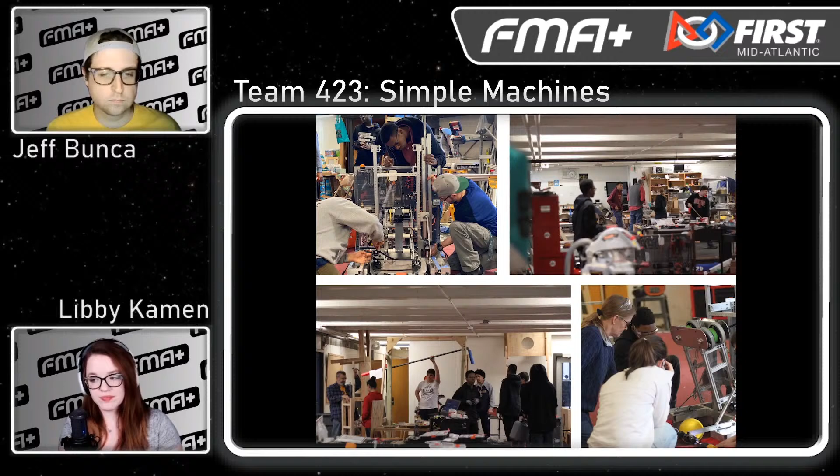At the beginning of the build season, we usually make a schedule and have deadlines to complete tasks, but we make sure to incorporate extra time for failing and improving because we usually learn the most from our failures. If we have time to fail, we usually end up with a mechanism that survives competitions and performs better, and we can use this information we gain from our failures to improve in the future.

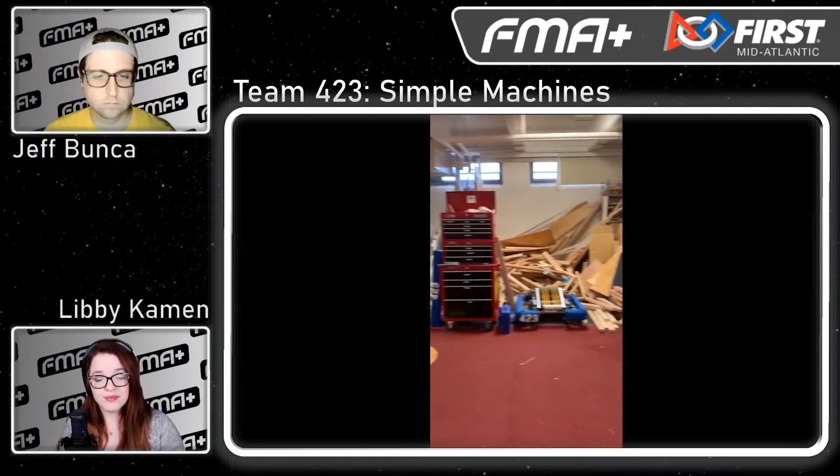One example of us planning for failure is how our drivetrain design is held in place with 2 bolts on each side, so if one fails, it is very easy to drop it out and replace it. At competitions, it's very common for something to fail or break. So when this happens, we usually make a note of how and why it failed, start thinking of possibilities to improve the part after the competition, and then fix it as much as possible before our next matches.

Nice. Yeah, Jal, let me ask you, how did those mottos get applied to building this year's robot specifically? Yeah, so the mottos that Joshua and Owen said, for example, engineering is choosing, helps us go about designing.

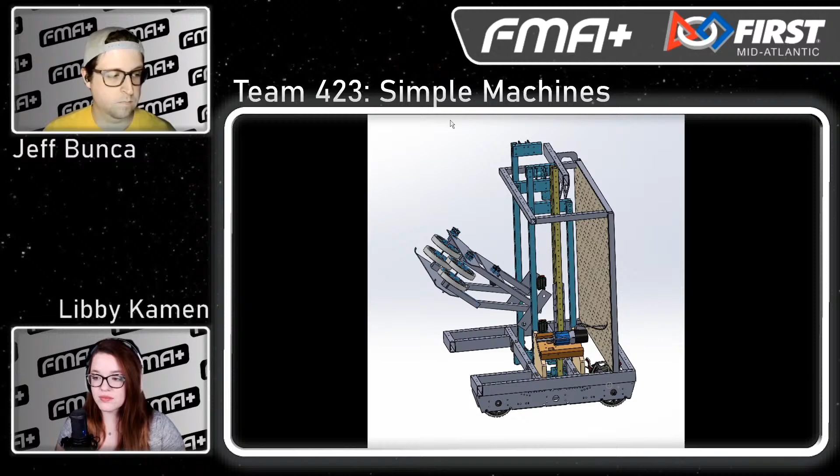So when we think of designing, we have to think about the consequences of each decision, and we balance those against Joshua's laws of robotics, which are: number 1, drive reliably; number 2, do at least one scoring task repeatedly; number 3, participate in the end game; and number 4, be prepared for inexplicable dancing.

Joshua's laws give us more focus on what to prioritize. So when we're in the early stage of planning, we look to Joshua's laws of robotics to narrow down which ideas to pursue. I love hearing about the structures for decision making that different teams make, so thank you for giving us insight into yours.

Now let's start with this year's robot, of course, from the ground up, as we typically do. Ryan, what was your solution for driving reliably, and is it different from typical FRC solutions?

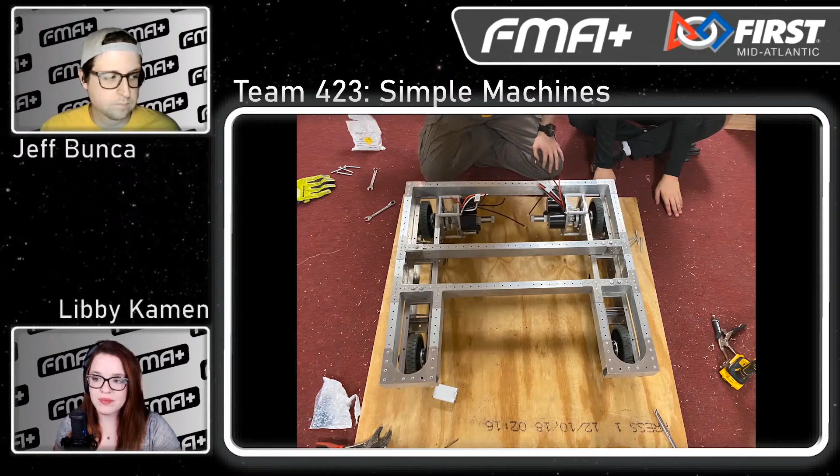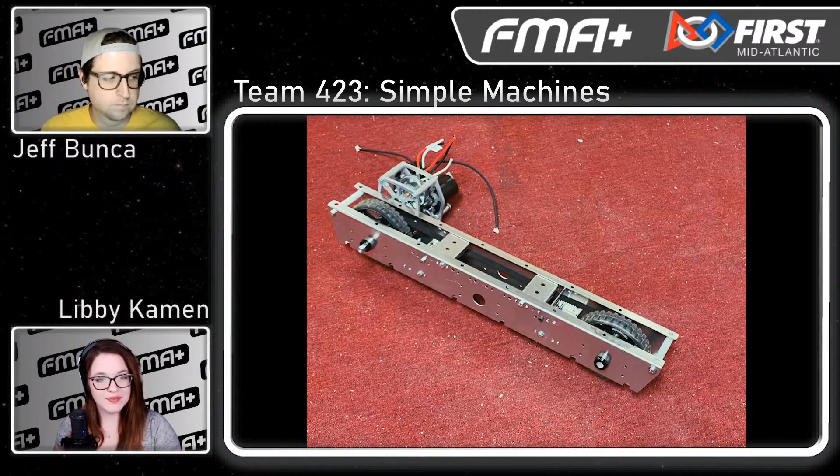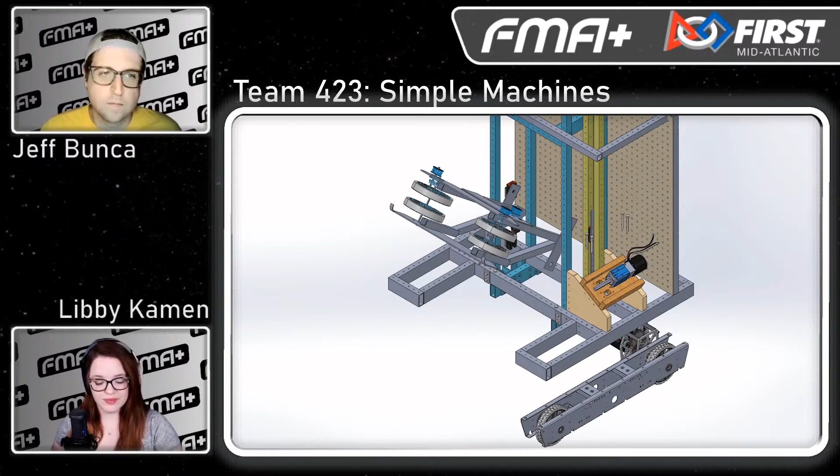So this is our second year of doing our custom design for our drive system. Last year we used version 1 of our bogie drivetrain, and this year we used version 2. We use a combination of off-the-shelf parts and design choices that yield a custom solution. The bogie drivetrain design is a 4-bolt droppable drivetrain where you take 4 bolts out and you can drop it off the chassis, so you can work on each individual side independently.

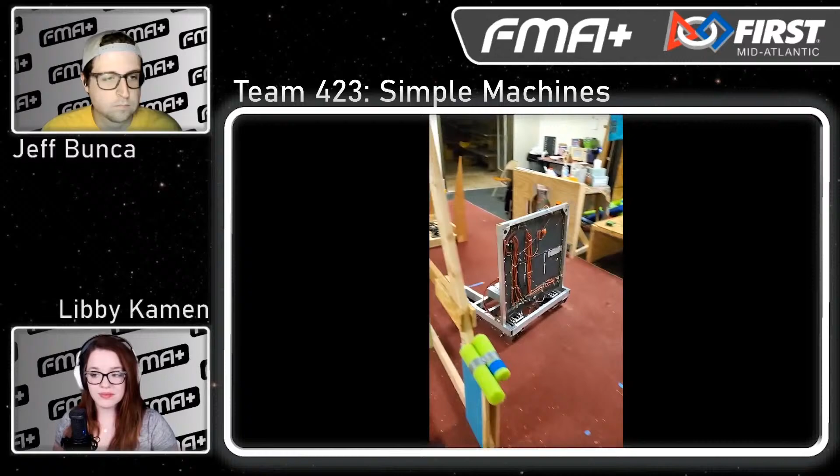The drivetrain is made from laser cut sheet metal and CNC press brake folding. We use aluminum sheets to create our lightweight design. The design allows for different configurations after fabrication if the overall chassis design needs them. It's able to change between a 4-wheel or 6-wheel design, and it's universal depending on where the motor is mounted. We use belts for easy tensioning.

We are using the Evo shifters for the first year, which allows us to have better control over the robot. Each drivetrain bogie weighs just over 10 pounds with motors and gearboxes, and the entire drivetrain and chassis weighed 32 pounds.

Nice. So, Owen, let's talk about scoring. What was the plan for scoring repeatedly this year?

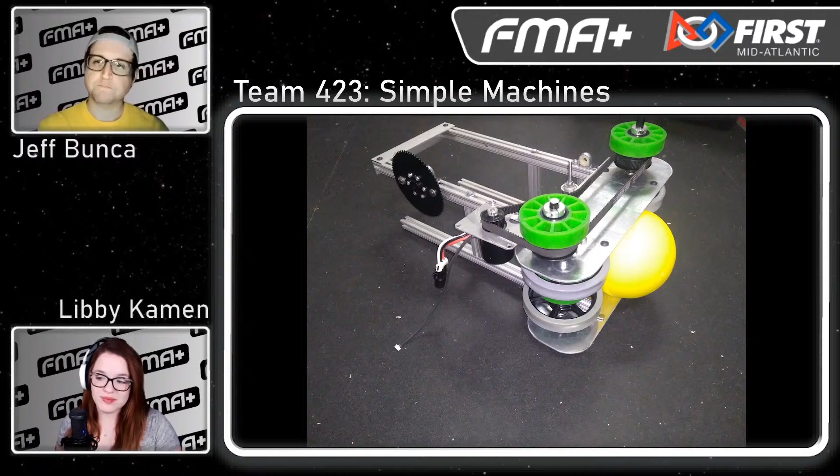Our plan for scoring repeatedly was to have a shooter that went down to the ground to pick up power cells, stored them behind the flywheels, sped up the flywheels, aimed at the goal, and then used a conveyor to push the power cells into the flywheels.

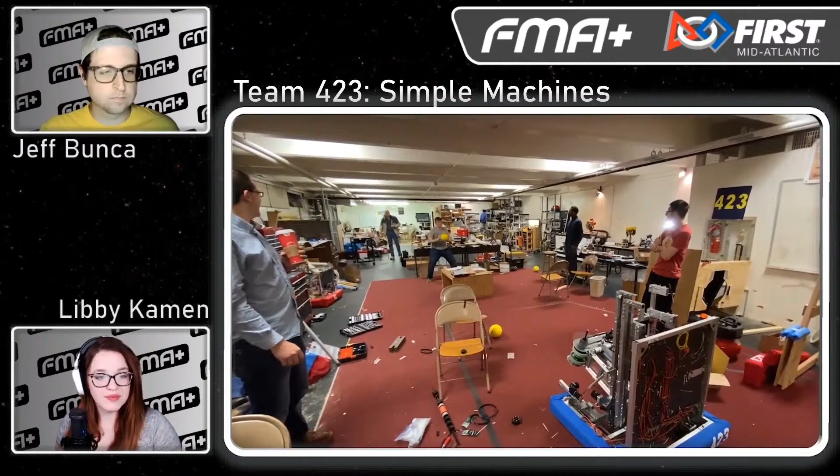Our shooter had a way to adjust both the speed of the flywheels and the angle it gets shot at, so we had multiple ways to adjust our shots in the heat of matches. Also, the shooter was able to pick up off the ground or the loading station, and shoot at all 3 goals.

Later in the season, we decided to add a mechanism that made picking up power cells easy. Our requirements for it were that it had to be light and it had to be able to drop out past the bumper to grab the balls and move them to the shooter.

Although there were some challenges with mounting the intake because so many things were changing on the robot at the time and we had to improvise a mount, we were able to create an intake that would drop down, center the power cell with mecanum wheels, and then push it into the flywheels of the shooter.

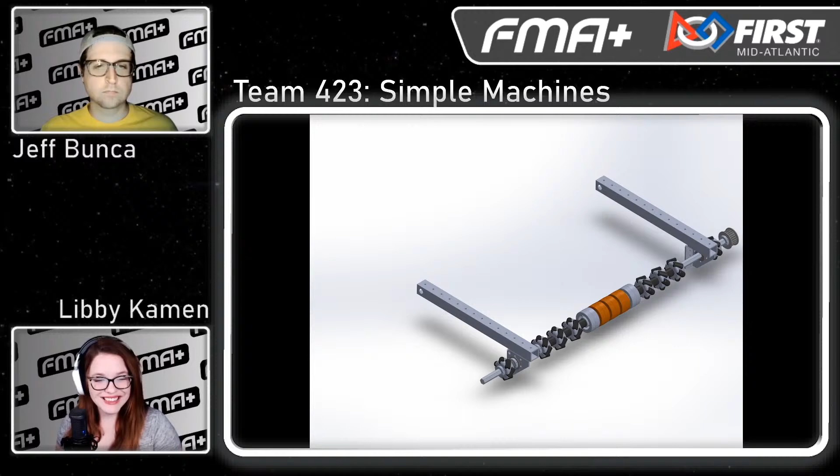Luckily, it did not break at the competition and was very good at what it was designed to do, and greatly assisted our pickup speed. If we still had access to the lab, we would probably make the design more rigid in case someone was playing defense on us, and we would make the wheel placement more efficient to center balls faster.

So let's talk about endgame. How did you guys participate in the endgame, and what did you feel was most unique about your solution?

Yeah, so we used a one-stage elevator, which allowed us to climb when the scale was at its lowest and middle positions. We used a commercial prismatic linear guideway, which was chosen after weight analysis and load testing.

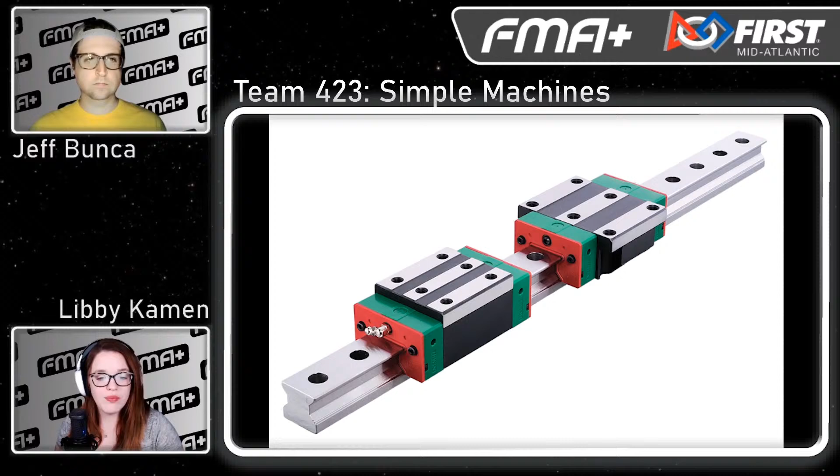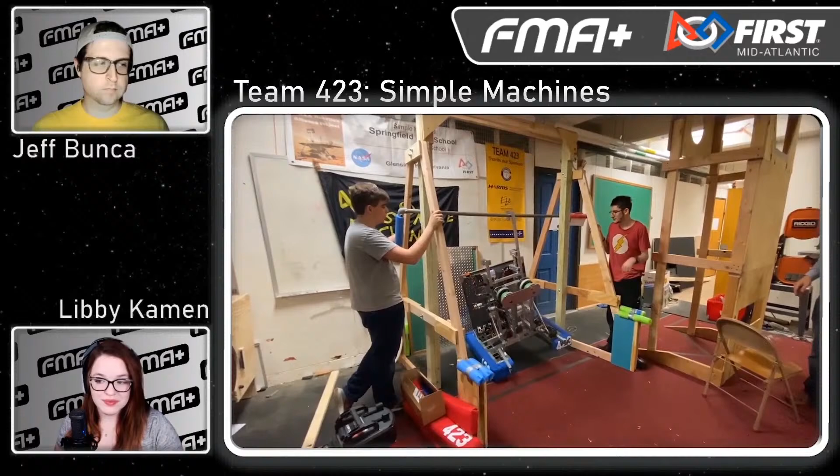These prismatic rails capture the carriage blocks in all directions while allowing them to slide smoothly while under load. The guideways are also hardened steel, which are heavy, probably why we've never used them before. But the prismatic rails give us the most travel distance because they're supported in the back so the carriage blocks can travel the entire length.

We had a very successful lift, having one of the most successful lifts in competition.

All right, awesome. So let's talk a little bit on the non-technical side. Venus, would you be able to speak a little bit about what you guys have been doing to establish your team's presence in your community?

Media and branding was one of our main focuses this year, exactly for that reason. It kicked off at Comcast Bootcamp when I attended a media roundtable. Shout out to Miss Daisy. They really inspired us during that roundtable, and we learned a lot through that session.

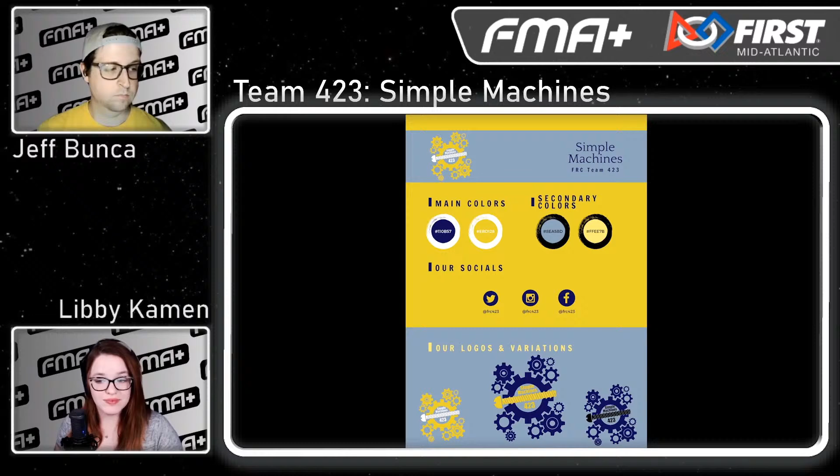We focused a lot on our consistency because we learned that the more consistent we are, the more recognizable we became in our school community and in the FIRST community. We made a style guide and kept the same logo we had the year before to help with that and to increase our visibility.

We also made a new website. Our old website was old and outdated and nobody really knew about it, so we made a new one that is now regularly updated and looks a lot nicer.

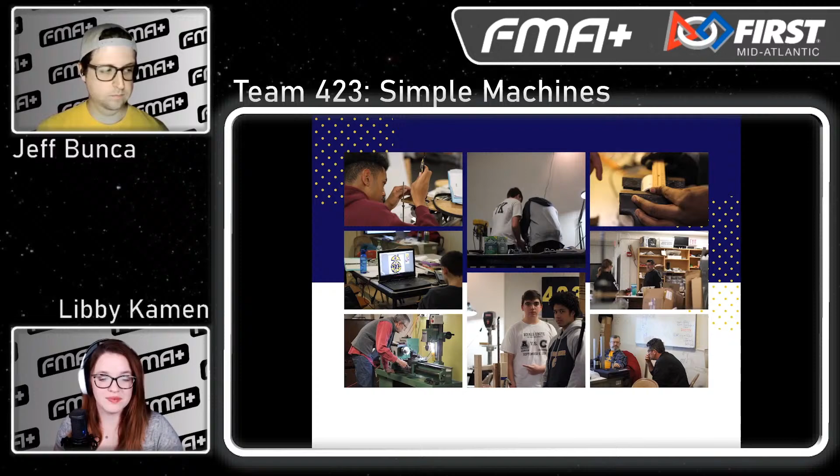We also increased the amount of pictures and videos we were taking. During meetings, we took pictures and videos on a phone camera as well as on a Canon camera. During Hatboro, we made it our mission to get good media content.

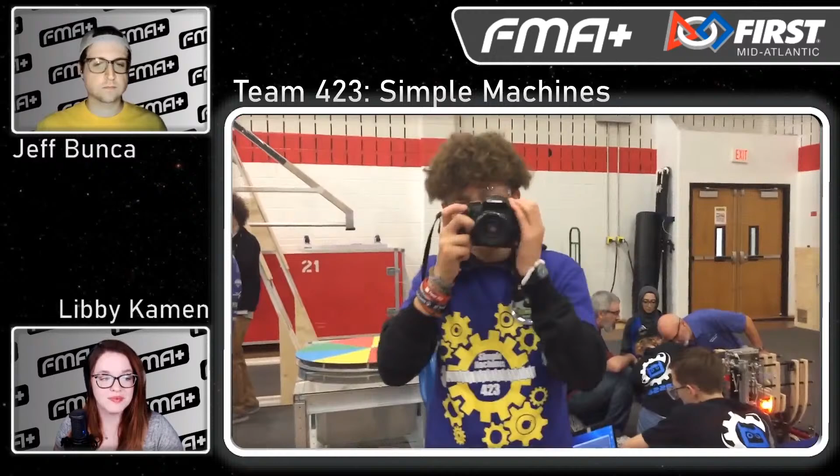During matches, I would take videos on my phone. Another member of our team would take pictures with a camera. One match, I would focus on taking videos of the robot and he would take pictures of our drive team, and then we would switch the next match. We also interviewed members during our competition and overall had a great time documenting it.

One of our biggest challenges was definitely not having enough people on our sub team. Since we're a smaller team, building the robot is the priority. Also, just not knowing what we needed to be successful, as it was the first time we put this big of a focus on our media content.

We are proud that we were successfully consistent throughout our season, and the interactions that we had through our school and through social media was something that we found invaluable.

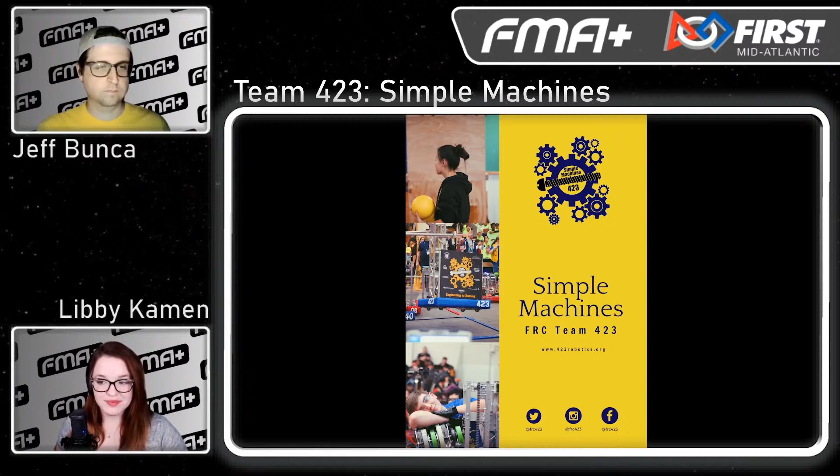As someone with a background and a career in marketing and social, I love hearing when teams think about this stuff. So props, I'm very excited to check all of this out.

Now, of course, 423, one of the teams who were able to compete this season. So, of course, what we've been asking all of our teams that have competed for Infinite Recharge: what did you guys learn? What was the experience of competition? What are you taking back with you for this future version of the season?

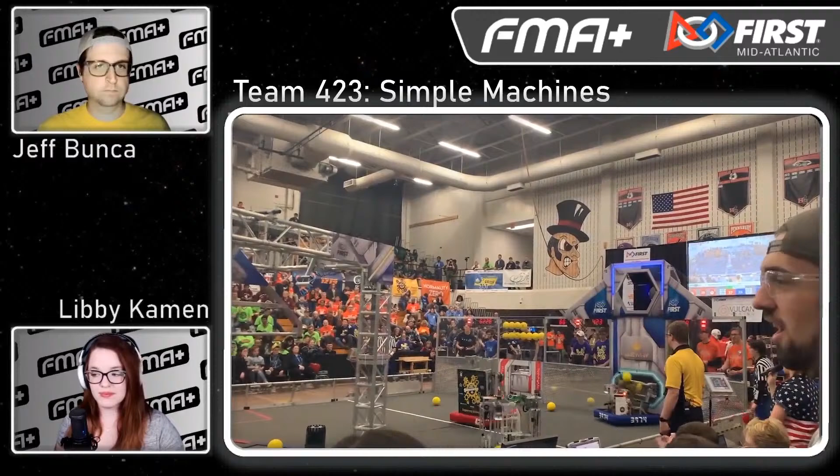We were very lucky to compete at all. All of our teams always helped us out by lending tools and vice versa, and that created a very lively atmosphere. This year, we tried a shifting gearbox instead of one with just one speed to allow us to have a low gear for precise movements and a high gear to get across the field quickly. We really like the low gear and believe that next year we will reduce it even further for more control.

Also this year, we tried a lift unlike anything we've done before, and it also worked very well even though it had little testing. We had to reduce from two to one separate lifts to save some weight.

Finally, we built an intake very late in the season to pick up balls more efficiently, and we were pleasantly surprised when it worked well. Sadly, we did not think about how hard it would be to aim the shooter with the electronics panel in the way, so a lot of our high goal shots ended up going over the goal and past the opposite driver stations. In matches, we learned very quickly what strategy worked best for us.

Because our shooter was inconsistent, we decided to attempt a shot and then drop the rest of our power cells so our teammates could grab them. And then we would play defense on shooting robots, and finally make sure we would climb because it was one thing we were very good at and it got us a lot of points.

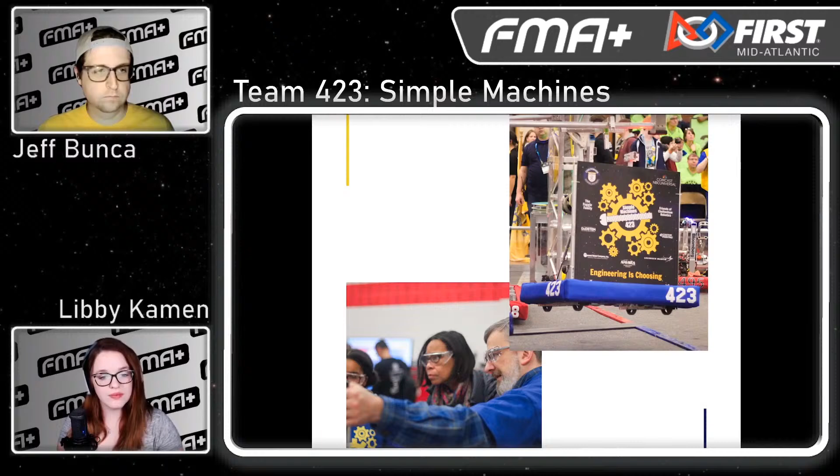Our lowest moments were during the eliminations when our climb didn't work efficiently because our drive motor mount kept bending the screws that were holding it on. So we decided to design a new motor mount to keep our tension on that chain and not destroy those screws, and we are sad that we weren't able to design and actually implement it onto the robot this year.

I hope to see that next year. Some of our highest moments were our climb working consistently throughout those qualification matches where they did work, and being chosen in an alliance during quarterfinals, which I would like to thank teams 6226 and 1218 for that opportunity.

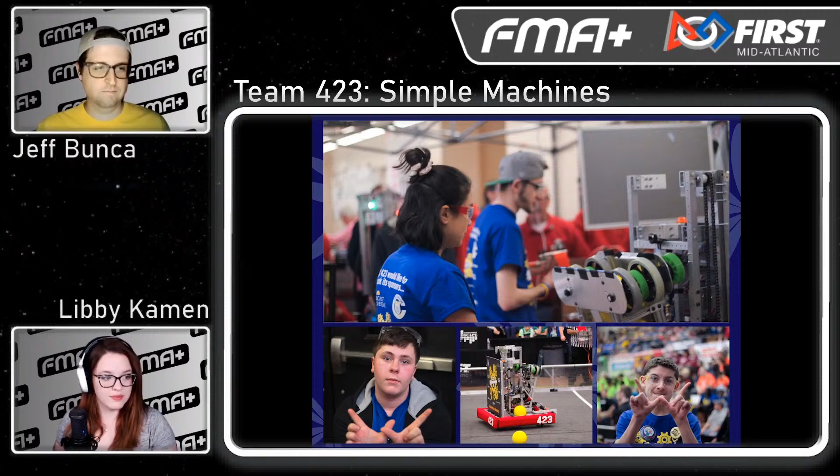Overall, our proudest moment from Hatboro was seeing a lot of elements of their robot working well with little testing, successfully climbing 10 times out of 15 matches, having one of the highest total endgame points, and as Ryan said before, going to the quarterfinals with teams 6226 and 1218.

So let me ask you guys this very general question: what were you guys most proud of?

This year, I was definitely most proud of our media team and having as many underclassmen on our team as we did this year compared to previous years. I was most proud of our team's growth because I feel like so many students got involved and learned a lot, so we'll be very prepared for next year.

Also, I was very proud of the intake I designed and fabricated because I'd never taken on a responsibility like that, and it ended up working very well with little testing.

I was proud about seeing the lift mechanism work and work consistently. I felt really proud about seeing something that I had drafted and built become very successful in competition.

I'm most proud of our bogey since I've been working on the design for 2 years now, and how sturdy and reliable they were during our competition season. I do believe that this design will live on throughout several more years of the team's history.

I'm really proud of the independence of our student leaders as engineers, fabricators, and peer mentors. It's awesome to hand them real raw materials and get back parts. It's also inspiring to watch them teach other students as they go about their work.

One of my favorite things about mentoring is being able to sit back and watch my students lead in a way that is empowering to them and makes them really feel, like you said, accountable to that project and able to accomplish something.

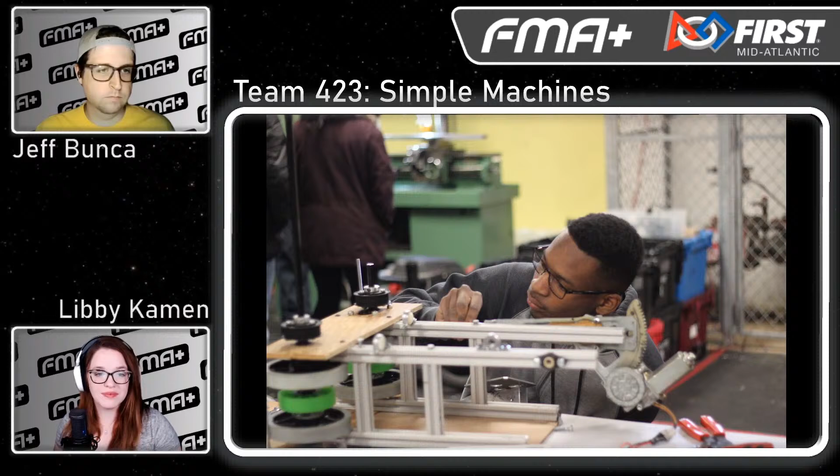What else about the Team 423 experience is different? Riffing off what you were talking about is the role of the mentors. One of the things that's a little different on our team is that mentors and students are peers.

This came from a speech Dean gave 20 years ago when he and Woody actually went to all 5 regional competitions. One of the things Dean had said was that he never envisioned this to be a 100% student-driven project. He very much wanted mentors of all kinds working hand in hand with the students and everybody putting in their best efforts. This leads to a really unique relationship between mentors and students.

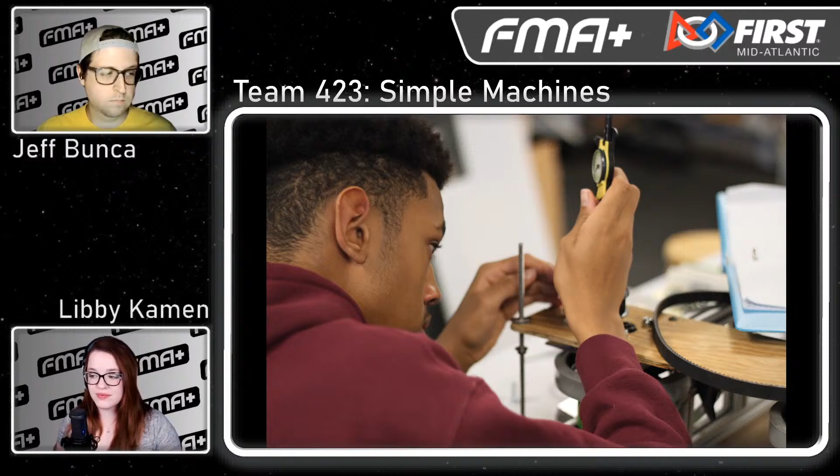We're not parents, we're not teachers. By the time our students get to the point where they're applying for colleges, I will have spent several hundred hours with them and really get to know them. Just about every student on this call, I've actually personally written a letter of recommendation, and it is by far my favorite part about being able to do this.

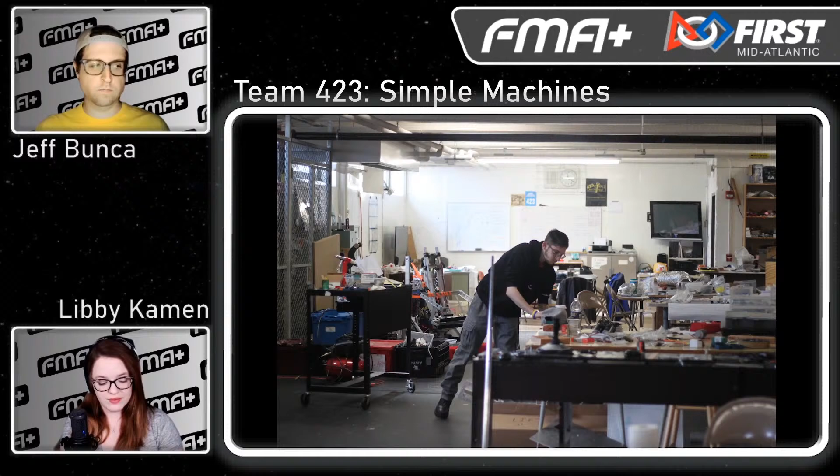I get to be a mentor and I get to help these students out, and I'm just so excited for their success and their scholarships and getting into college. It's more than just robots, and it really allows us to be more than just what it is about building and engineering students. It's outside support as well. So it's a very cool relationship.

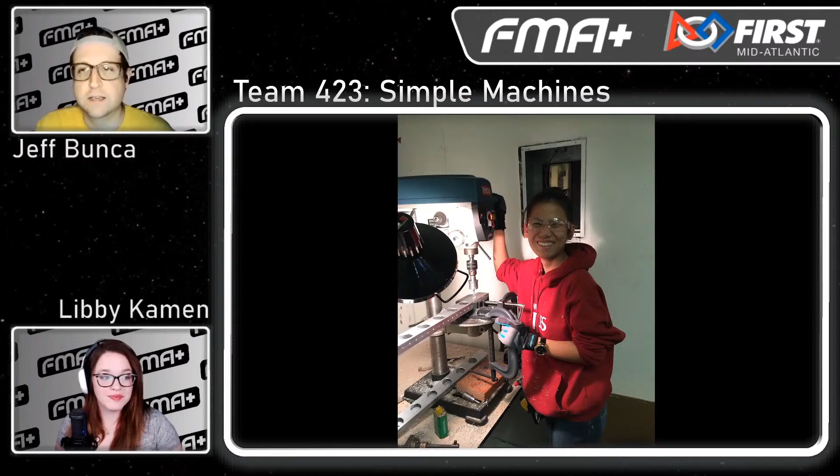It was great hearing from Team 423 Simple Machines tonight. Sounds like they have a very interesting team dynamic and a cultural aspect to their team, which makes them very unique.

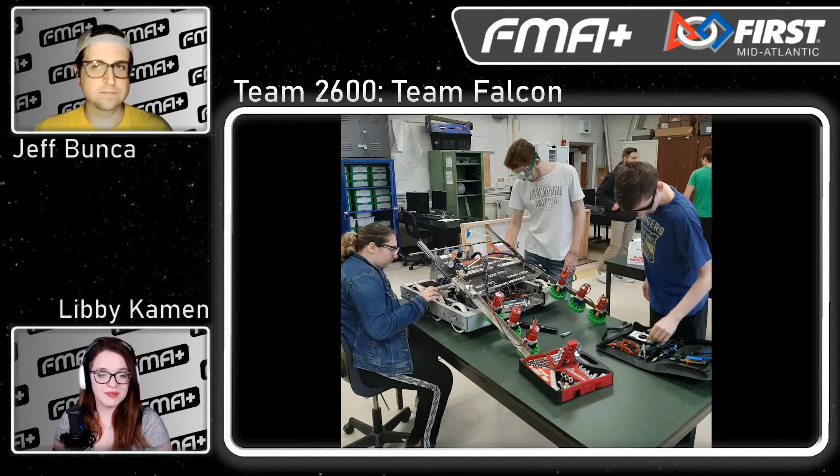Hi, I'm Joseph. This year I am a sophomore, and when I joined robotics I didn't know what I was doing. Then I just got right into it, and I knew what I was doing. I was the first sophomore to be on the drive team as well.

So Joseph, let me ask you, looking at our notes here, it looks like there's a particular challenge you had to go through when you joined the team. Maybe you could tell us a little bit about that. I'm curious to hear the story.

So I had a surgery where I couldn't do any heavy lifting, so I wasn't allowed to do anything, and I got yelled at when I tried to do heavy lifting. So what I wanted to do is I learned Photoshop to make a sticker that we put on the robot. The sticker was called Falcon X because it's our 10th robot.

I love it. I think one of the really interesting things is that FIRST teams are so multifaceted—there's so many things that can go on at once around a team. And I love that, even if there was a physical challenge at a certain part of the year, you got onto the media and art side.

So let's dive a little bit into this year's robot and your challenge. What's different about the systems you guys developed this year? Our robot is different because it is completely student built, unlike some other teams where the robots are built by the mentors. Ours is completely student built and programmed. Time management was something we had to work on, and also figuring out a design that everyone can agree on.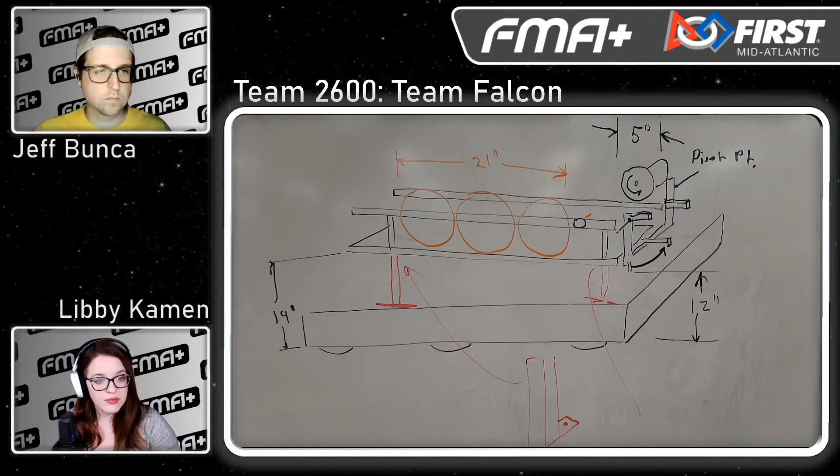So what about the weight limit in terms of the robot in its final form? Usually our robots aren't super heavy, but this year we chose to go with a welded piece on top for the ball shooter and holder, made out of steel, so it was really heavy. It weighed down our robot, so we had to make some compromises - we kept that part but took out some extra parts we didn't really need.

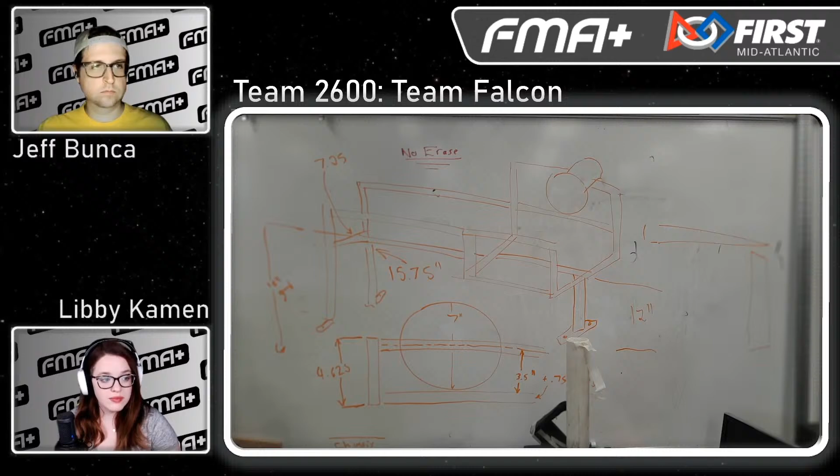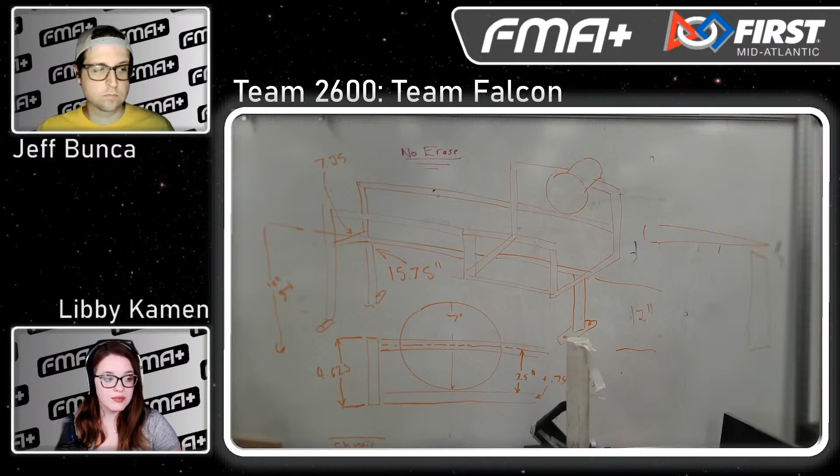What were the iterations on that ball holder design? One design we wanted was like a circle, with the shooting mechanism kind of like a turret that would turn 360 degrees. But then we decided on plastic velcroed on, kind of like a conveyor belt, with a motor where the steel was welded, bringing the ball up over the top to shoot out. We had it velcroed because the previous year we didn't have accessible parts, so this year we wanted it accessible - if we had to work on something in the pit during a competition, we could take it apart easily and put it back together.

So you guys move into actually testing and troubleshooting and stress testing the design. Jenna, maybe you could talk a little bit about that.

That last design Joey talked about with the conveyor belt style - when we were testing it, we had the motor running for a really long time, and it came not super loose, but it wasn't in the same spot as before. During stress testing, we learned it really wasn't as strong as it needed to be to hold up during a competition, so we scrapped it all and figured out something else to make sure this never breaks on us, which is why we went with a whole welded frame.

Yeah, durability is super important in FRC, right? It can make or break that competition experience. So I'd love to hear a little bit more about your manufacturing, Joey.

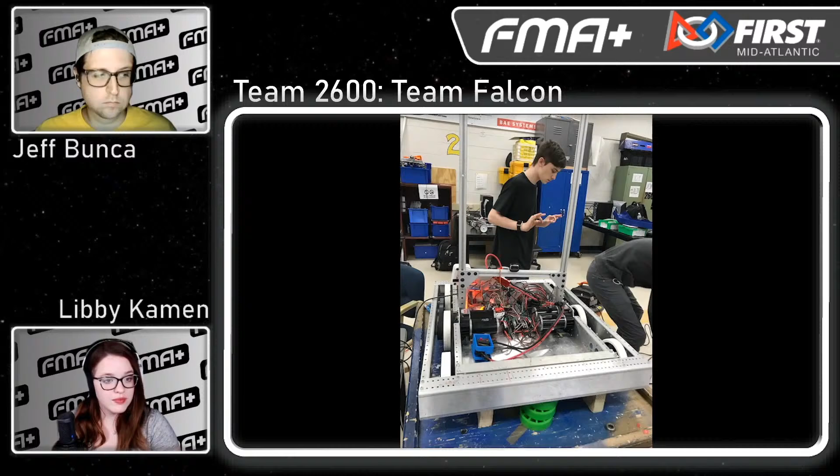For the ball intake, we made it out of aluminum square stock, and the holder out of steel square tubing, which is where we welded. One of our other mentors actually taught us how to weld that part, so we learned some welding, which is actually really fun to do.

Jenna, is that something you guys have always had the capability to do, to weld parts like that? No, not really.

This is why we're talking about it so much, so excited about it, because before the team didn't really have a mentor who knew how to weld or had a welder that we were allowed to use. We used our mentor's welder, and he's the one who taught us—it's not a skill that many of us had. So it was really awesome for us to get to learn that, and we were very excited about it.

I think one of the most unique things about the FRC experience, like you said, is working with mentors to learn a new skill or a new component in your education that you might not be having in the classroom. Now I'm seeing something here about integrating some math in here as well. So Joey, maybe you'd like to expand on that.

When we wanted to get the angle for the shooting mechanism, we had to test many angles, and we actually did have to use math. So say at a certain distance, we had to figure out the angle and the speed of the motor that we wanted to shoot, so it would hit the target.

We also took the measurements so our ball would fit in the system of the intake and the shooting. With the measurements, we had to make sure we still had enough room for the components, like the motors and the roboRIO. At one point, we had to move the battery box to one side so we could fit the whole shooting mechanism in the back.

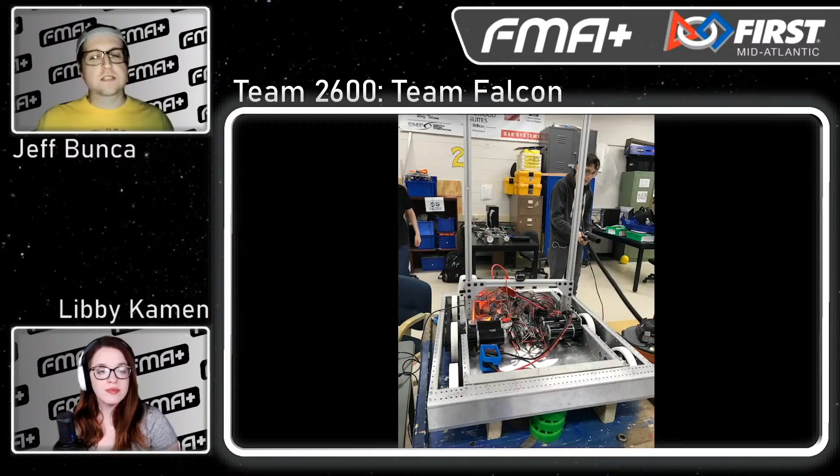Let's talk about some of the goals. What were some of the objectives that your team set your sights on for this year? Because we're really a student team, we have to pick a few goals that we know we can complete by the time it's time to go to competition.

One of the goals we picked was to have 3 balls in the holder when we started each match. That way we'd know we had enough balls to start shooting, so we wouldn't have to go and pick up balls right away.

This seems like a very achievable goal to start with 3 balls, but when we started making the holder, we had to make room for other things like wiring and the roboRIO, like Joey said. So we couldn't make the ball holder that big to hold 3 balls on its own—we had to cut it down to 2 for that design with the conveyor belt.

But once we scrapped that design and started this other welded one, it was actually elevated above the floor of the robot. So we could have all that wiring and the roboRIO on the floor and have the holder elevated up, so we could hold 3 balls and make it bigger while still having enough room for everything.

I really love the idea of hearing about other teams' iteration process—when we tried this and it didn't work, and we tried that and needed to adjust it. I'd love to hear a little bit about material selection from you guys too.

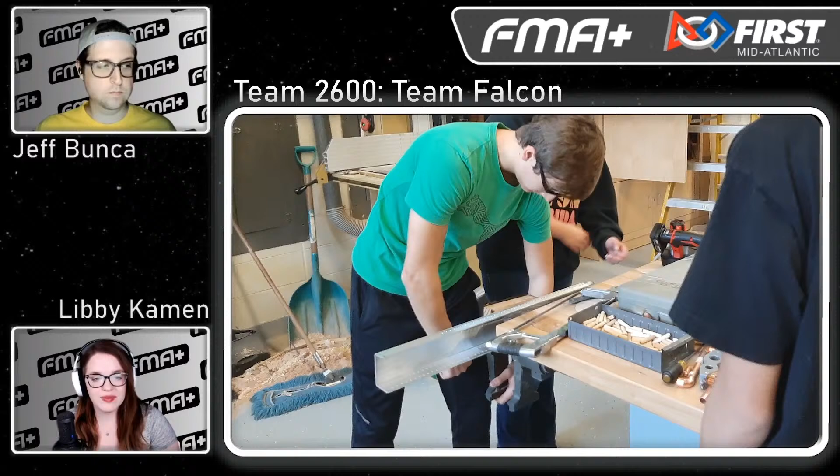We started with plastic, and it was aluminum and plastic together with Velcro—it didn't hold up the way we wanted it to. So we learned the importance of actually picking the right materials, because we moved to steel, which is much stronger, and it was able to really be welded together and not come apart under stress.

And it's really a life lesson because that goes with everything. If you're going to build something like a building or a bridge, you need to know the right materials so it holds up over time.

Yeah, it's cool—I applaud you as a student on a team, able to recognize some of the life lessons that FRC can offer you. I think that's what makes it really valuable. You can apply that in your real world situations and in your careers as you move on and past FRC. So that's great, Jen, I'm glad to hear it.

Joey, let me ask you, what's something that you're super proud of in regards to what the team's done? I'm most proud of how hard the team worked, because without many members, each person had to do more—they all had to take on more responsibility. Some of us had to take on multiple roles.

Yeah, I know Jeff and I have both had lots of FRC experience, and I think we've both been on big teams and small teams. Depending on the size of the team and the group of people, everyone's got to wear multiple hats, and it's really cool to hear that you guys are taking that responsibility on. Jenna, what about you? What are you most proud of or taking away from your FRC experience? FRC has really helped me learn how to be on a team, how to take responsibility for a section of the team, take charge, and get my ideas out there while also listening to other people's.

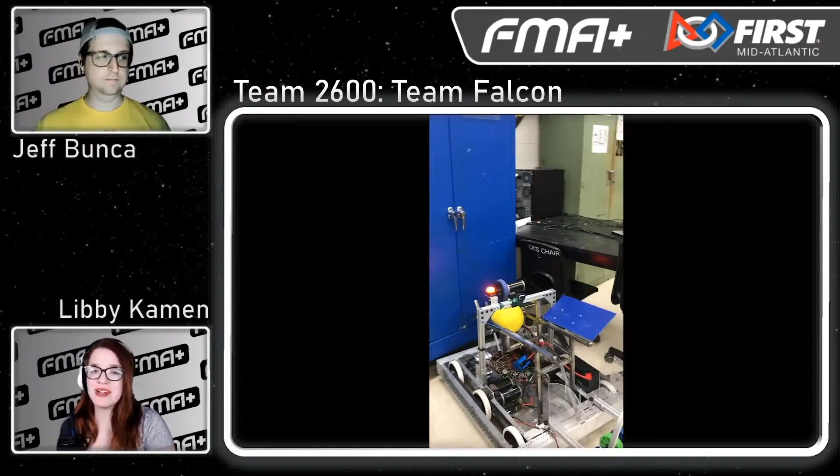Cool. So we're here with Team 303, the Test Team out of Bridgewater, New Jersey. I'm here with student representatives Nick, Natasha, and Vishnu, as well as their mentor, Mrs. Nason. So with that, I'm going to hand it off to you guys. Why don't you introduce us to Team 303?

Hey everybody, my name is Nick, and I'm currently a senior on Team 303. This year I was one of our project managers on the team, and I was also the driver for our robot. Hi, my name is Vishnu. I'm a junior on the team this year, and I was the lead programmer and the operator on the drive team. Hi everyone, my name is Natasha. I'm also a junior on the team. I was one of the project managers this year, and I was also the human player for our drive team. Today we are going to talk a little bit about our robot design and how our shortened season went.

Very cool. Well, it's nice to meet you all. Why don't you get us started with a little bit of your 2020 robot design?

Sure. So when coming up with a plan for our robot design, we like to gather for a group discussion, and we go over all the rules and misconceptions that people may have. We use that to come up with a priority list of tasks that we think our robot should be able to complete. Once we have this priority list, we split the team up into different prototyping groups for each of the subsystems we intend to have on our robot. For this year, for example, we split up into a drive base team, a shooter team, a climber team, an intake team, and a control panel team, so they could all work together efficiently.

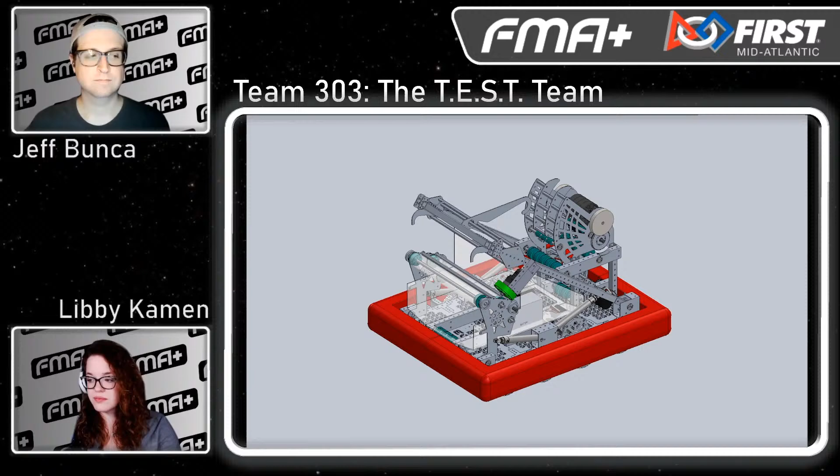We encourage our prototyping groups to come up with a bunch of different designs for each of these ideas so that we can test out multiple designs and see what works for each subsystem. Once we have identified the best design for each mechanism, we then move to converting each mechanism into an electronic design in SolidWorks, and then we move on to integrating them into a final robot design. Once the design is complete, we can then move on to manufacturing and assembly.

As far as our actual design goes for this season, we took a lot of inspiration from successful robots that competed in games like Stronghold, Recycle Rush, and Aim High. We knew we wanted our robot to be capable of loading power cells from the floor, shooting them into the high goal, climbing on the shield generator, and spinning the control panel. In our design, we wanted to prioritize short cycle times through the trench run, as the safe zone in the trench run would provide protection from defense.

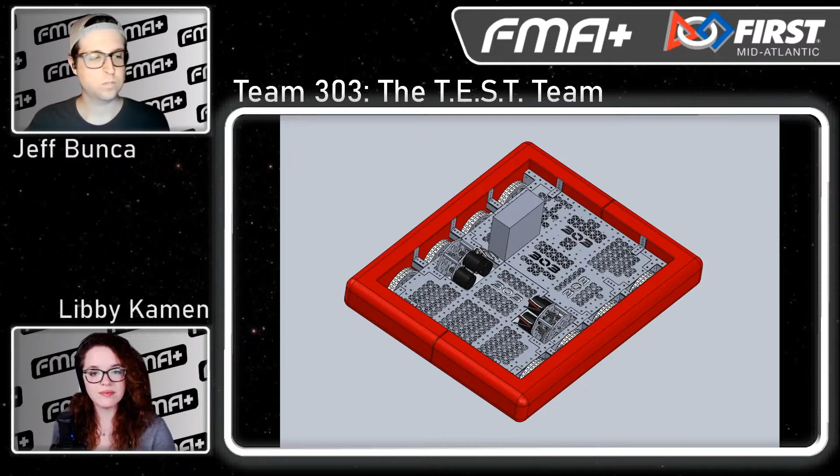This meant we had to design our robot with the capability of fitting underneath the trench run. We also planned on shooting power cells from different spots within the trench run to mitigate the effects of defense on our scoring effectiveness. For this year, our drive base was an 8-wheel West Coast drive with 6-inch VexPro traction wheels built on a 1x3-inch extruded aluminum box. It has a 1/16 inch drop center to reduce the amount of side scrub and to allow the robot to more easily navigate the shield generator in the middle of the field. Our drive base is powered by 6 Falcon 500 motors and is able to travel at around 11 feet per second.

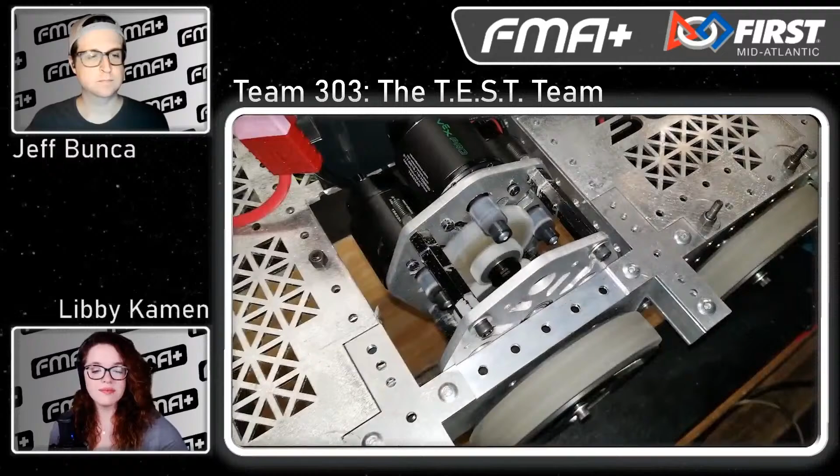Our electronics are mounted upside down on a belly pan so that they are more easily accessible and serviceable. This belly pan also serves to make the drive base itself more rigid.

The intake on our robot deploys out over the bumper with 2 pneumatic cylinders. It uses 3 polycarbonate rollers that are linked together with a number 25 chain to suck up the power cells, up and over the bumper into our indexer system. The intake is powered by a single Neo 550 motor.

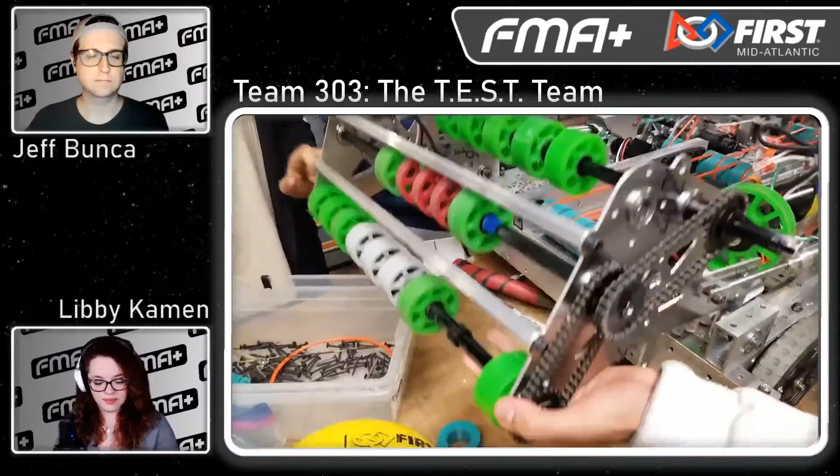The indexer system receives the power cells through the intake mechanism and stores them in an open top hopper. There are a series of custom 3D printed pulleys on the floor of the hopper that have polycord running on them to feed the power cells backward toward the shooter. The polycord system is also powered by a single Neo 550 motor.

The open top hopper also allows us to pick up power cells from the ground as we originally planned, as well as from the human player loading station.

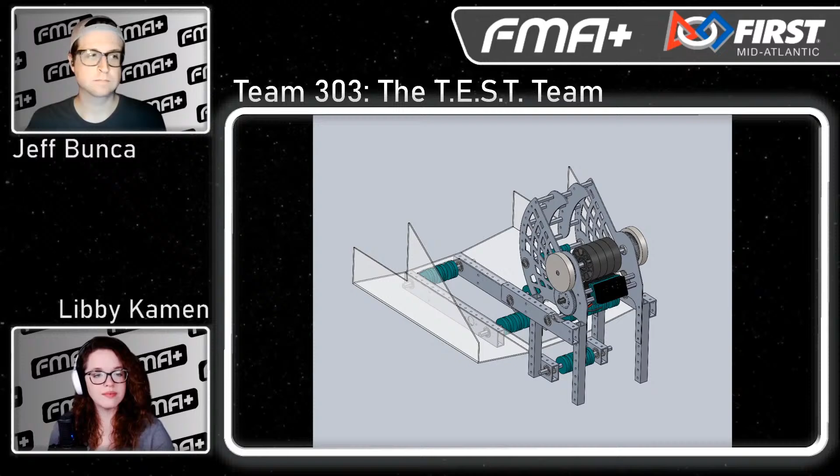Once the power cells are loaded back into the indexer, they move on to the shooter, which is a fixed angle single wheel hooded shooter, which uses four 4-inch Colsons to propel the power cells. It is powered by two Rev Neo motors, and in addition to this, it also has two custom steel flywheels to gain more rotational inertia. This has allowed the shooter to run at a very consistent rotational speed, even when shooting out the 5 power cells that we have stored.

Our climber uses a similar design to the elevators that we have created in the past 2 seasons of FRC. It's a custom single-stage elevator made using 1x1-inch extruded aluminum box, and it's powered by two Rev Neo motors. The design uses a constant force spring to shuttle the carriage up and two AM steel ropes wound around a hex shaft to pull the carriage back down once the climber is hooked onto the shield generator switch.

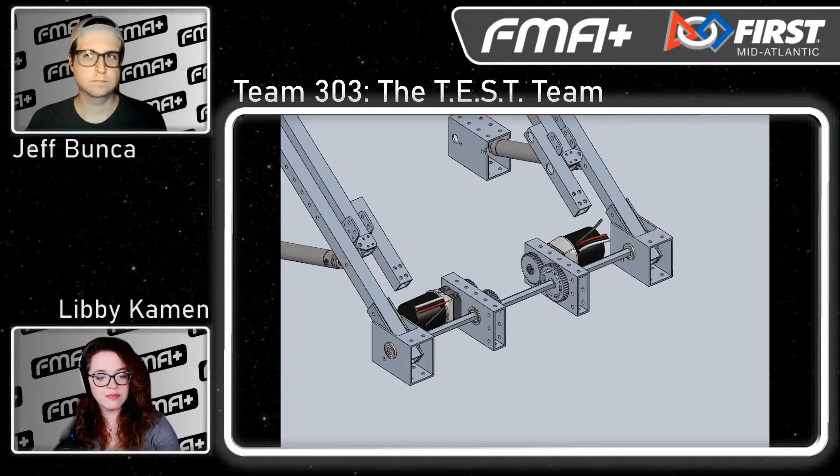Because we had set out to fit underneath the trench run, it would have been impossible to store this elevator designed vertically, as it would have been too tall. Because of this, we had to articulate the entire climber subsystem. The lift is stored diagonally and in its retracted state throughout the match, and it uses two pneumatic cylinders to extend the climber into a vertical position when the robot is ready to climb.

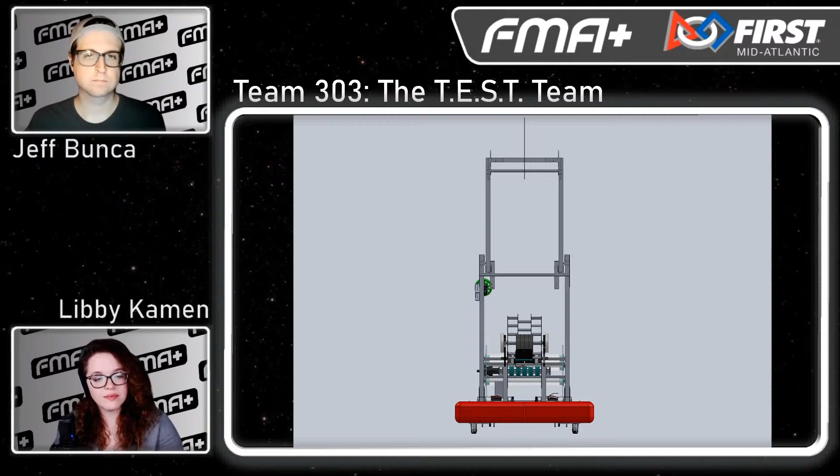Additionally, we have a secondary fold-out hook, which extends when the lift is raised up so that the robot is able to reach the rung more easily.

Our control panel mechanism is an anti-mark green compliant wheel powered by a Neo 550 with a color sensor mounted to the bottom of it. It's easily integrated into our climber mechanism as the climber was already actuating up and down during the match, so it was easy enough just to mount the control panel motor onto the side of our elevator.

Nice. Yeah, it sounds like you guys had some pretty creative approaches to the challenge of packaging a robot together in this game that has all of that functionality. And it looks like you guys did a great job. Vishnu, maybe you can run us through some of the background on the programming and software that runs this robot.

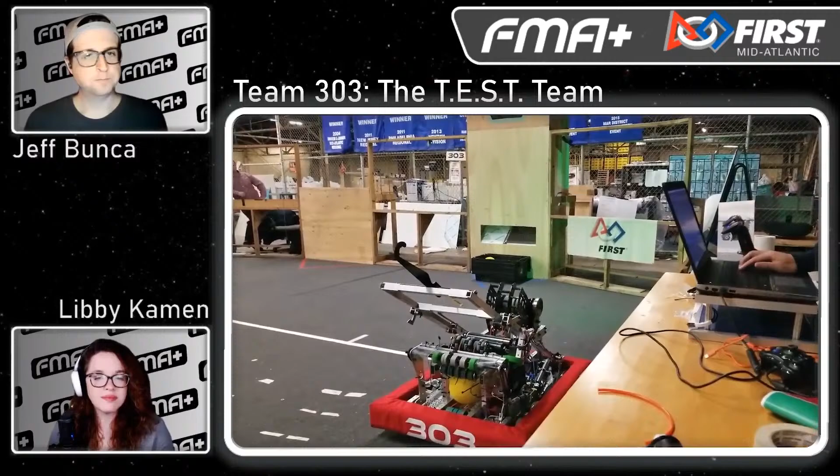Yeah, so our team accomplished a lot in terms of programming this year, but the aspect we were really most proud of is the autonomous capabilities. We implemented some different functionalities in our autonomous code. We used the limelight to turn to face the power port as long as the limelight could view it. We not only use this during the autonomous period, but we also use this during teleop to aid the driver. We also implemented Pathfinder and trajectories to be able to follow different paths that we wanted it to follow during autonomous.

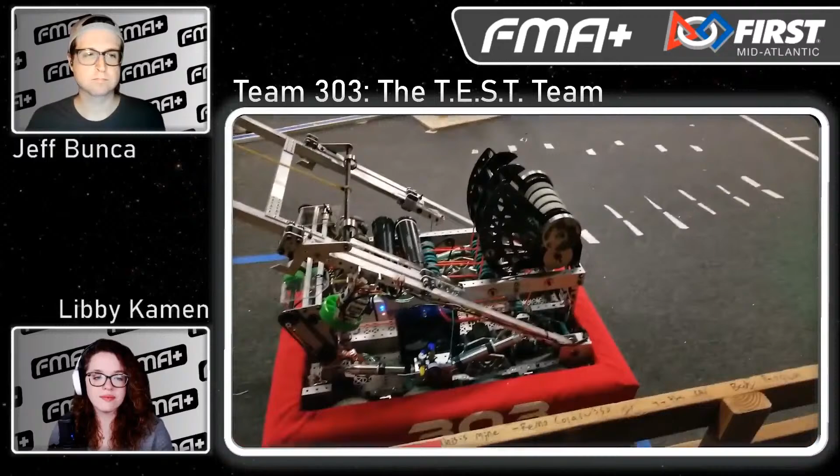Because the season was cut short, we were unable to polish some of the functionalities and in some cases even try some out. For example, we were in the process of writing a program to detect the closest power cell via vision code and move to it autonomously. Although it wasn't as smooth as we wanted it to be, it did work and it gave us a good understanding of what could be improved.

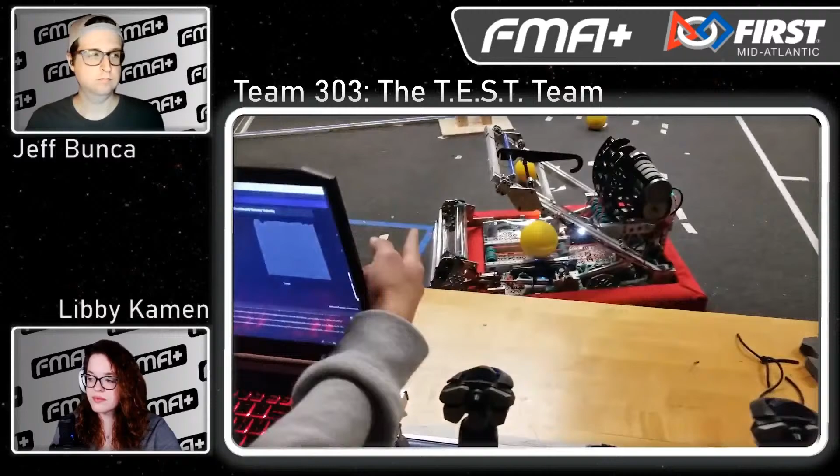During the Hatboro event, we had an indexer mechanism which we wanted to use a time of flight sensor with in order to autonomously line up, space out, and get a power cell ready to be shot based on how many power cells were in the indexer. Another cool ability that we had working but wanted to polish was having our shooter adjust its velocity based on the distance.

We used our camera and trigonometry to calculate the distance from the power port. We would then use an algorithm, using values we had tested, to find the ideal velocity for a given distance.

One thing we were working on and were close to finishing before Hatboro was an 8-cell auto. The idea was to start with 3 power cells, shoot those, then pick up 5 power cells from the trench and shoot those too.

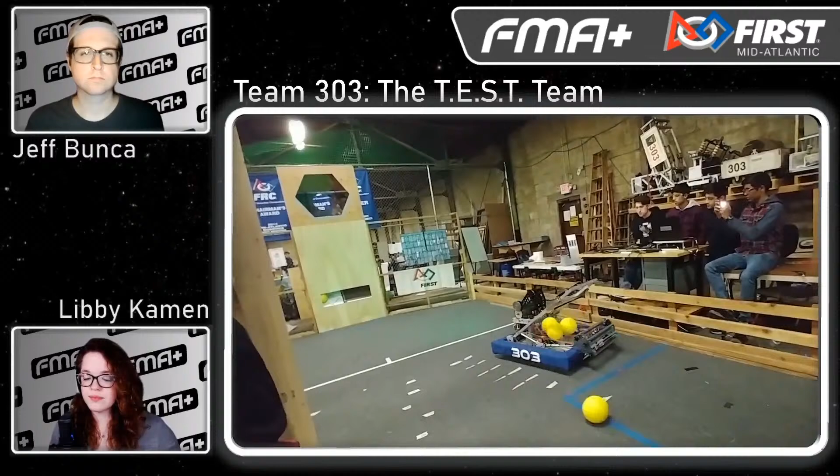Overall, we were pretty proud of what we accomplished in programming this year, and we're definitely excited to keep extending on those ideas. Well, thank you so much for the deep dive.

I always love hearing about other teams' robots. It's part of the reason we do this, and I've definitely loved getting a look at the 303 machine. Now, you guys got to compete at the Hatboro-Horsham District event. Why don't you shed a little light on that experience for us?

Yeah, so our team had a very interesting experience at Hatboro. Before one of our matches, we had disabled the vision targeting light in order to work on the robot. However, we forgot to turn the light back on before the match, so when our autonomous code ran, the vision code was not able to align with the power port without the light being on. We ended up shooting the power cells into the stands. It was a learning experience, though.

During another match, we accidentally rotated the control panel before stage 2, but we like to say that this was on purpose—so we decided to rotate the control panel in order to showcase our robot's functionality. But overall, our experience at Hatboro was great.

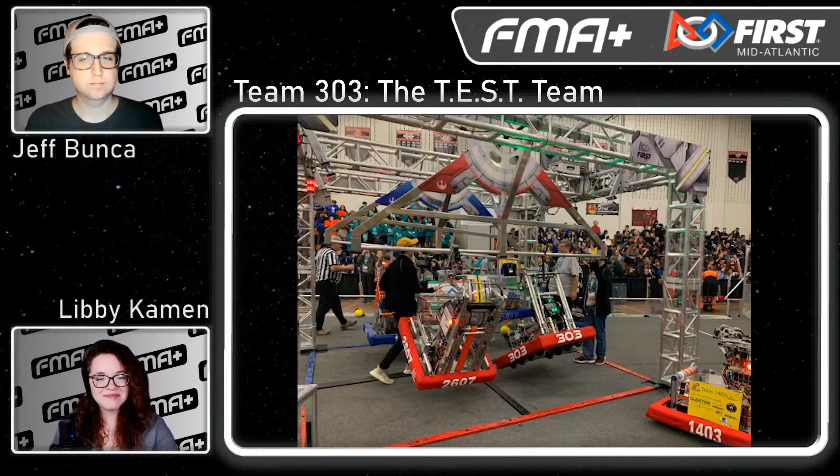Everyone on the team had a great time and was very excited to see the robot we had been working on for weeks finally pay off and compete. We are very thankful that we had the opportunity to compete this season.

Nice. Yeah, it sounds like Hatboro was a fun time for you guys, and I can appreciate that you looked at the challenges as learning opportunities. So with that being said, what kind of lessons have you learned from Hatboro? And more specifically, what areas would you like to improve after getting the opportunity to compete?

Yeah, so certainly Hatboro provided a lot of things that we would like to improve on. After competing at Hatboro, we had a better idea of what worked and what didn't for the robot for this specific game. We originally had a different design for our intake and indexer mechanism, which used a time of flight sensor to count and space out the power cells within the robot. But we found that the system was super clunky and inefficient, so we set out to redesign both the intake and indexer for the Mount Olive event the following weekend.

What resulted was our current intake and indexer design, which we affectionately call our 'intake in 2 days,' as it was designed and built in just 2 build meetings. It used parts of the old indexer and an entirely new intake mechanism and hopper system, and it functions much better than the previous design.

In terms of programming, competing at Hatboro definitely taught us a lot. Going forward for next season, we would like to improve our robot in a few ways. We need to more effectively tune our intake and indexer to make sure that power cells flow smoothly throughout the robot. We want to continue to tune the shooter for different velocities from different locations. It worked best in the front part of the trench, but we were on the way to tuning it, and it would have been great if we could get it perfect.